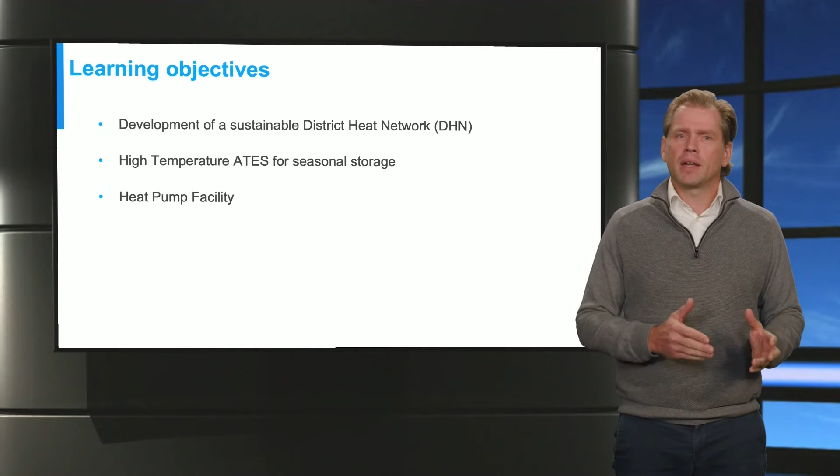In this lecture, I will showcase the development of a sustainable district heating network using several technologies you have learned about in the previous videos. Secondly, the high temperature aquifer thermal energy storage, also called ATES, used for seasonal buffering of heat. A key element in the district heat network is the heat pump facility. And last but not least, all the challenges involved in the district heating network development.

We start off by discussing the heat demand of the TU Delft. In the graph on the screen, you can see the required heating power of the TU Delft in a year. This shows that the peak demand during the coldest days is about 27 megawatts, while there's a full stop in the system in summer, which is very typical for the TU Delft. There's no students around, so no demand for heat. The surface area below this line represents the total yearly heating demand of 200 terajoule.

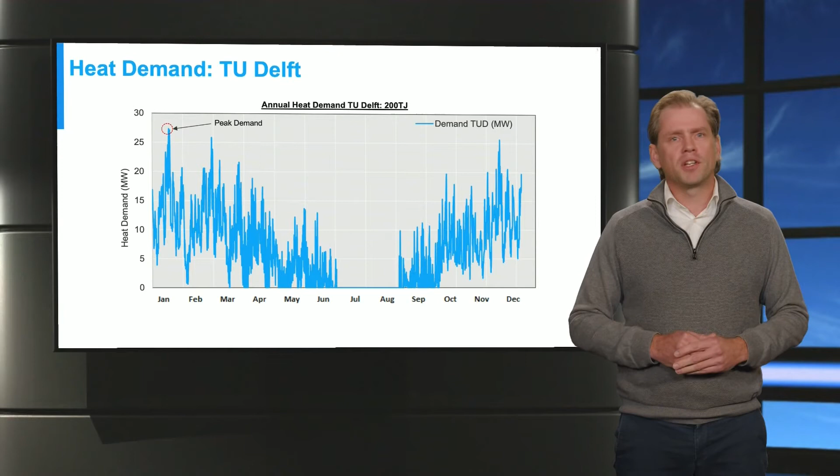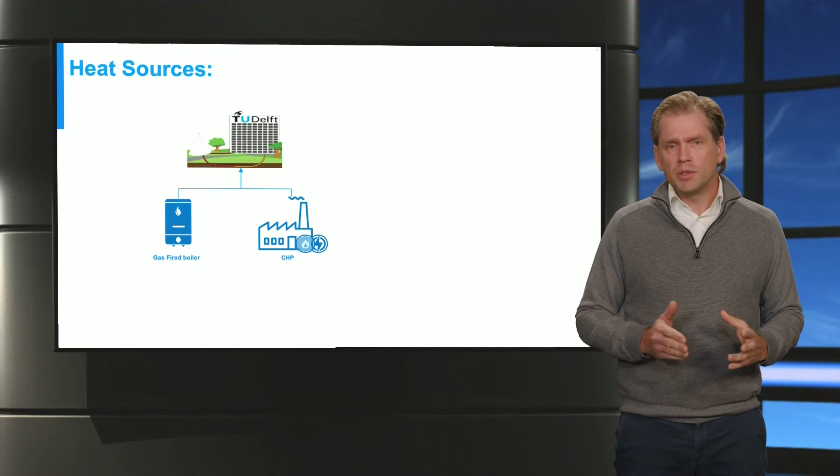The total heat available from the geothermal well, when running at full capacity with a delta T of 20 degrees Celsius, is about 235 terajoule per year. So potentially there's much more heat available than the 200 terajoule required by the TU Delft campus. However, due to this mismatch in demand and availability of heat, the geothermal well can only deliver about 135 terajoule directly. In order to close this gap, we need to apply large-scale seasonal heat storage.

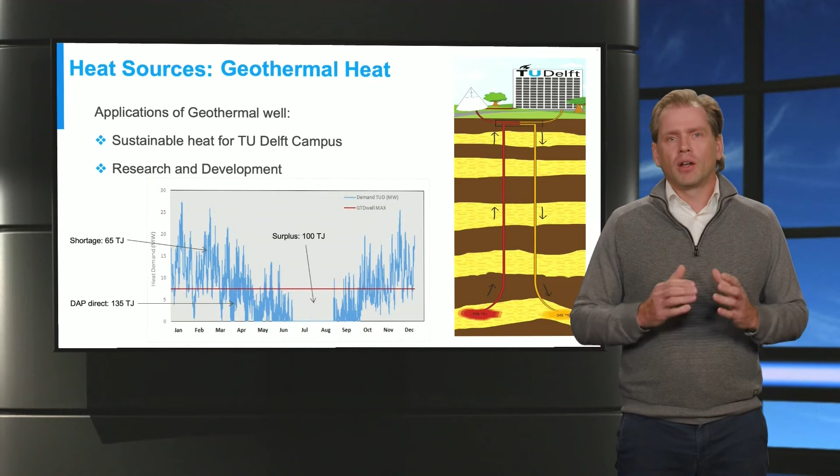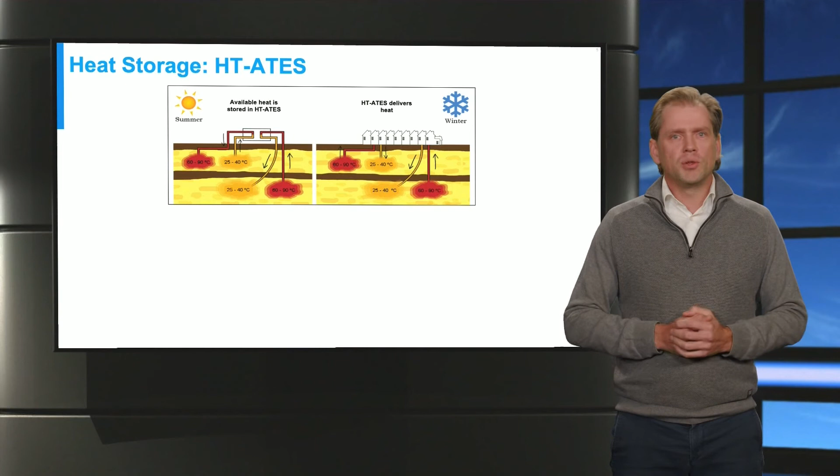High temperature ATES, as it is called, is used to bridge the seasonal mismatch by storing heat in the subsurface. This improves the total delivery of heat from the geothermal well to the district heat network considerably, and thus better utilization of the sustainable geothermal heat source. During summertime, the heat is stored in the high temperature ATES system. In wintertime, the stored heat is used for the cold days.

Using high temperature ATES with a 7 megawatt thermal power output and a seasonal storage capacity of 50 terajoule, the net energy shortage can be reduced to 15 terajoule, thereby greatly reducing the dependence on conventional energy sources.

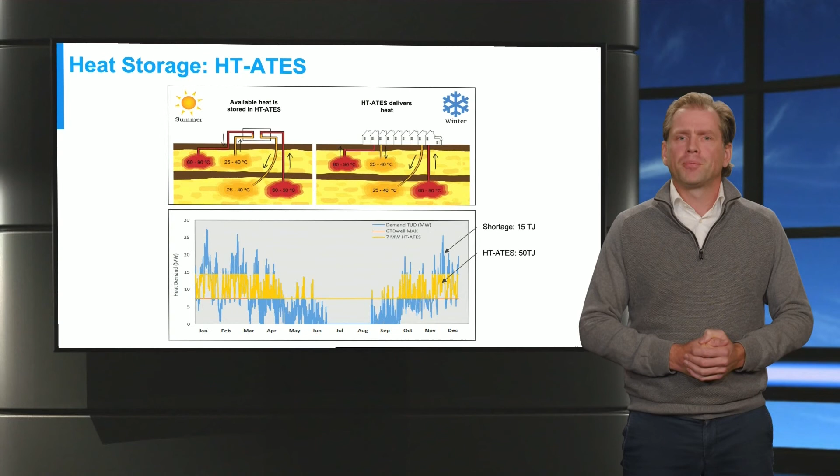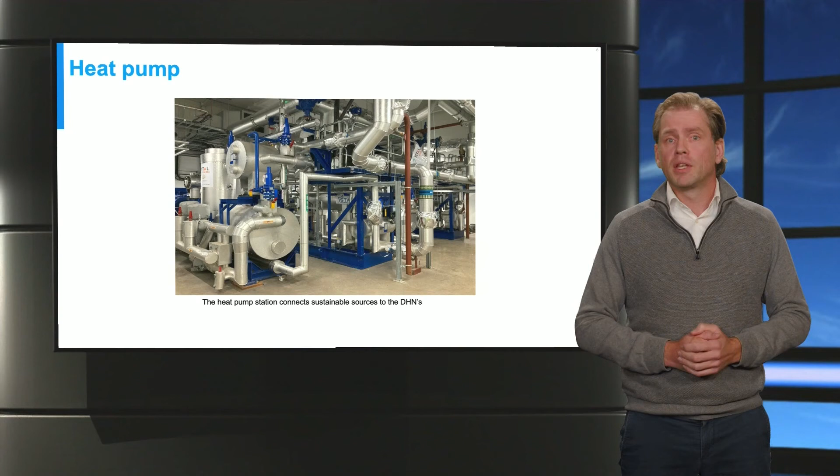The last important component in this district heating network I want to introduce is the heat pump facility. In this facility, 2 heat pumps are installed with a total heating capacity of 21 megawatts. The reason why we need to install this facility is to ensure the supply of the required temperature level and increase the yield of the geothermal well at the same time.

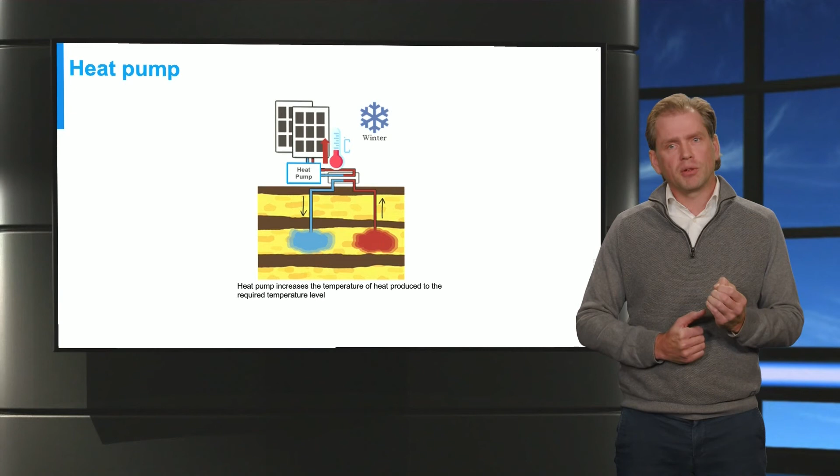Let me explain. The main goal of the heat pump is to increase the temperature level produced by the geothermal well to the required levels in the district heating network. The heat pump also extracts the heat from the district heating network return stream, and thereby it lowers the injection temperature of the geothermal well, hence increasing the delta T and the capacity of the geothermal well.

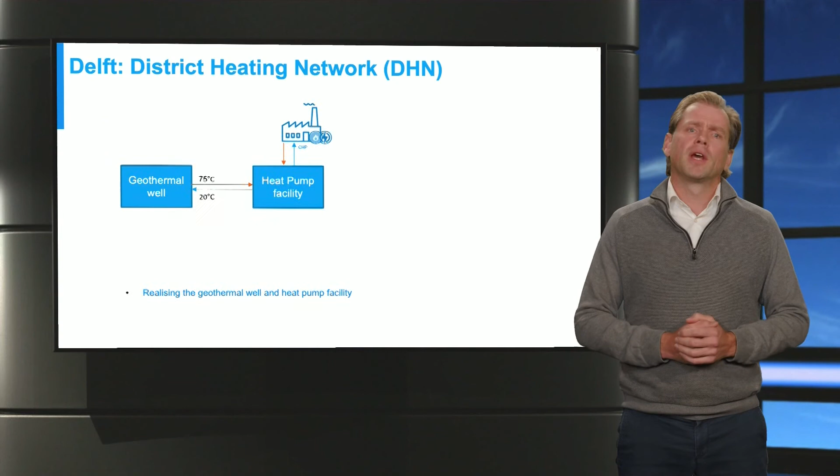The map here represents the new district heating network for the city of Delft. The future activities planned with this project at the TU Delft include realizing the geothermal well and the heat pump station. Secondly, connecting the existing and new district heating network. Thirdly, connecting the high temperature ATES for better utilization of the geothermal well. Thereby the heat pump facility really gets a central role in supply and demand coordination.

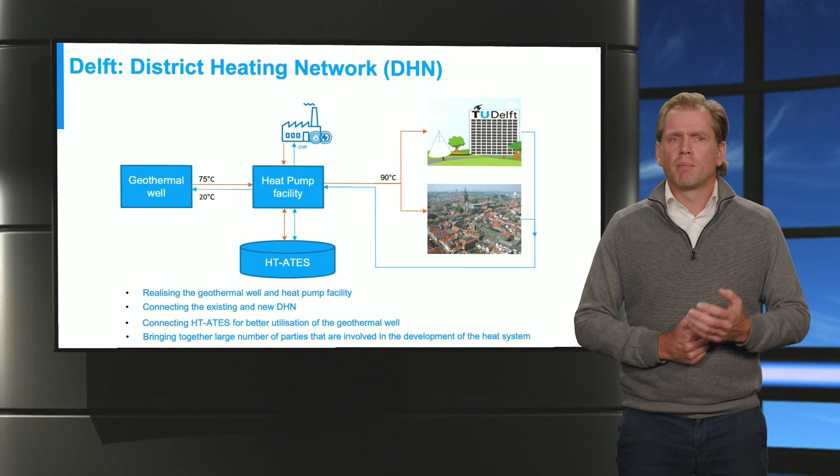Bringing together a large number of parties that are involved in the development of the district heating network also takes some effort and can really have an effect on the duration of the projects. In the development of district heating networks, various complexities and challenges are involved. Let us take a look at the major ones. The first one is matching supply and demand for optimum utilization of resources and reducing dependence on conventional energy sources.

Secondly, multiple partners are involved in the development of the district heating network. Working with multiple stakeholders really increases the complexity of the overall project. Decision moments on the various district heating network building blocks need to be aligned with interests of all stakeholders. And finally, we have a very rigid subsidy scheme offered by the government, and that also increases the complexity of the development of the district heating network.

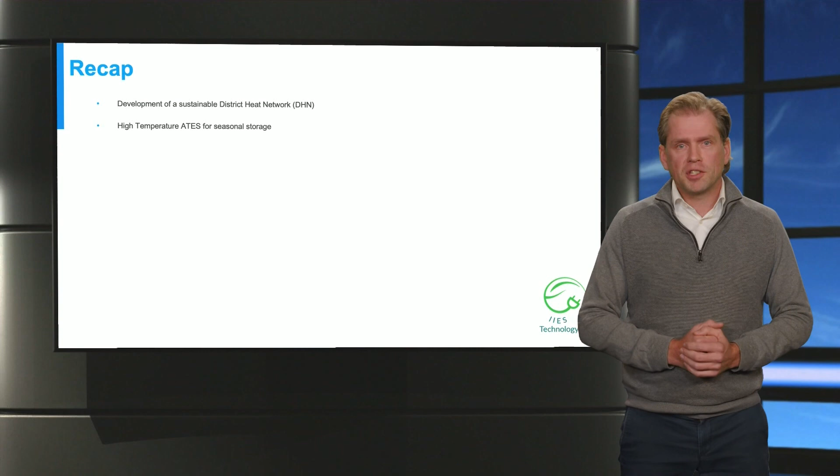To summarize our learnings, we looked at the development of a sustainable district heating network and discussed various building blocks. Starting with the high temperature ATES, we learned about the benefits such as improved utilization of the available sustainable energy from the geothermal well. Then we looked at the heat pump facility and its benefits as a temperature service for the system. Finally, we talked about the challenges and complexities involved in the development of the district heat network.